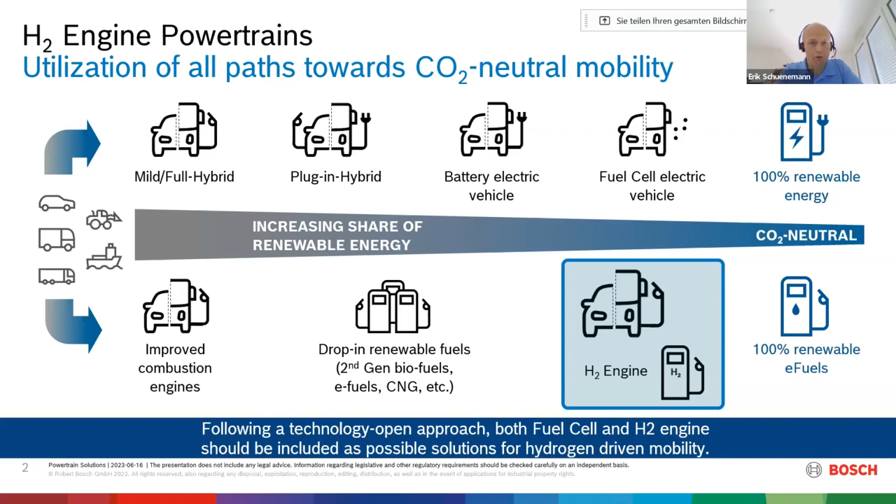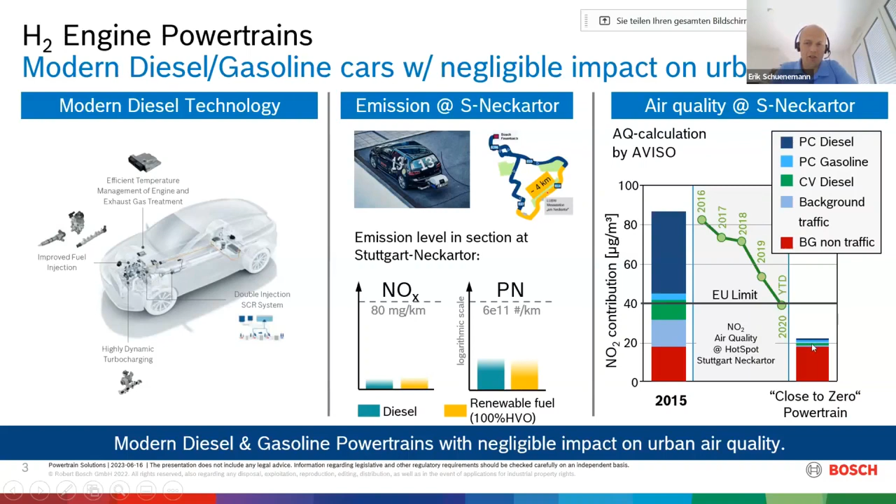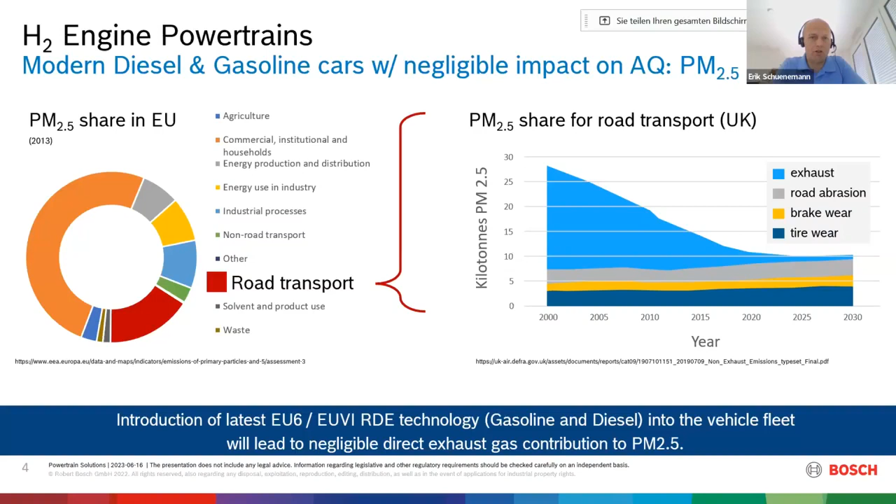Actually, this will get better with hydrogen engines because in hydrogen we have no carbon. That's why particulate emissions, and I would show later also that NOx emissions from hydrogen engine vehicles are significantly lower than I showed you for the latest diesel and gasoline technology.

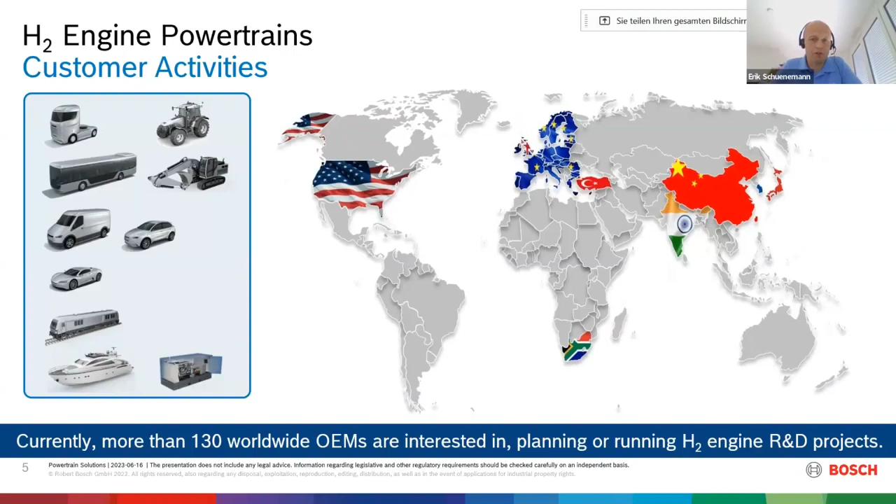And in this case, it also includes the transport sector. Because if the green hydrogen can be produced cheap and can be transported in a low cost situation, that means locally, for instance, with pipelines, then the price at the pump is very attractive and could be even more attractive than for drop-in gasoline or drop-in diesel e-fuel, and also could be more attractive than electricity. So that's why a lot of countries in Africa are jumping on the hydrogen value chain at the moment.

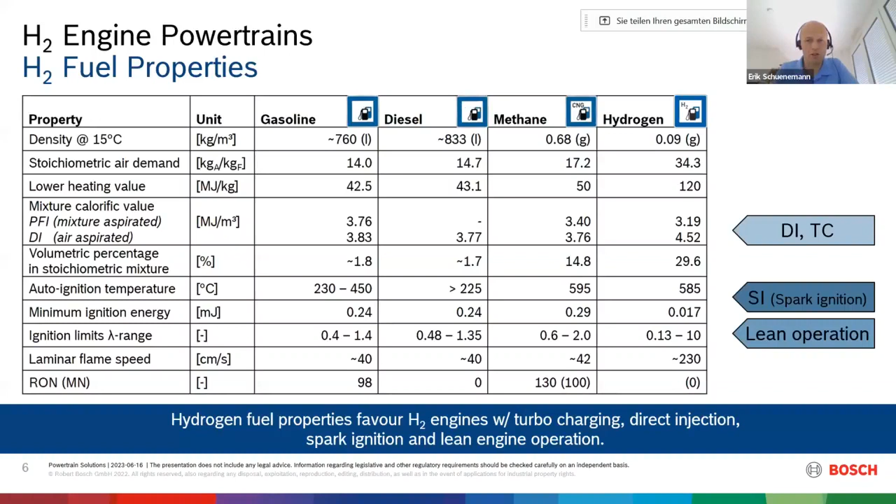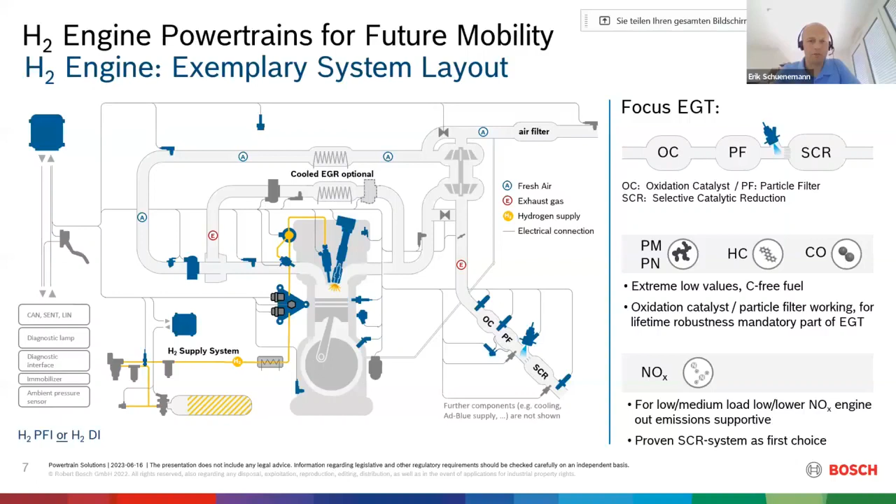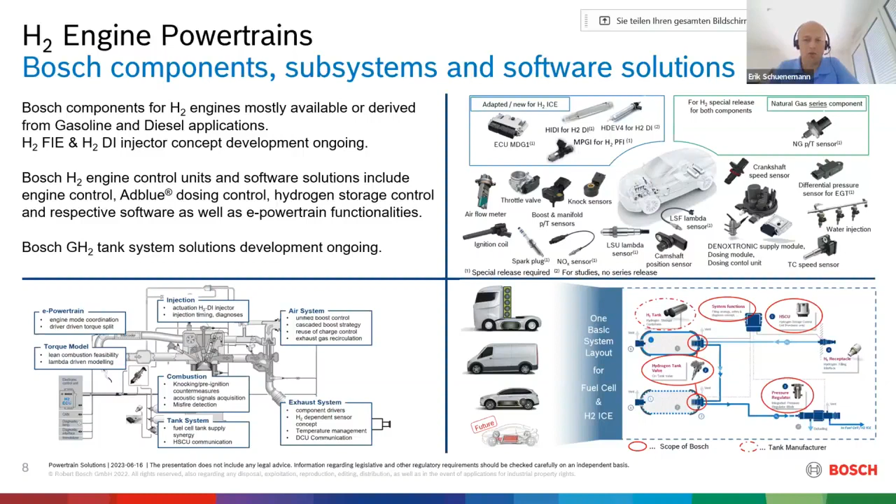Quickly on the injection system - I already mentioned we are focusing on direct injection, in this case low pressure direct injection. There are also some activities in the market where participants use high pressure direct injection, which might give some benefits regarding combustion control. On the other hand, it either reduces the driving range because you cannot run your 700 bar tank empty, or you need an additional compressor to increase the injection pressure or hydrogen pressure for the injection again.

On the other hand we have this kind of diesel-like combustion system, but this needs a diesel pilot injection, so basically we have two fuels then. So we are also not focusing on this right now. Our focus is low pressure DI, and low pressure means a range of 40 bar injection pressure.

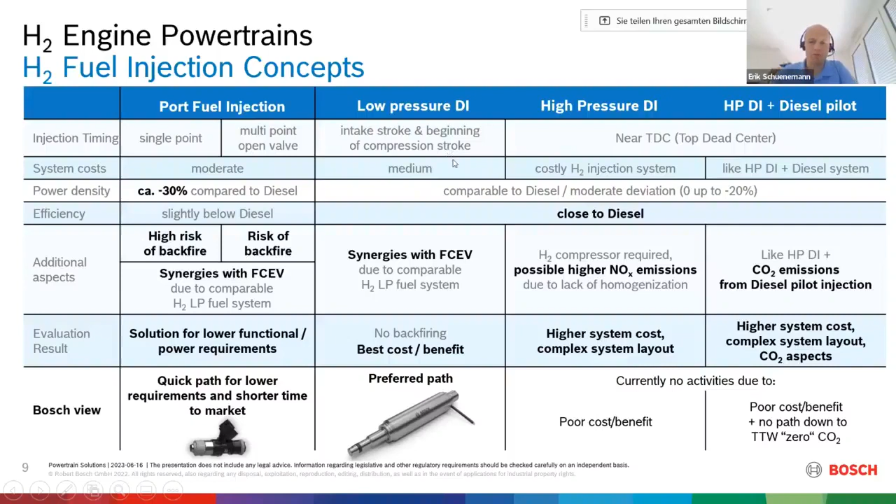When we look at the hydrogen gas jet of the injector, we see that the gas jet development is very sensitive to potential guiding of the jet. Normally the injectors we use for hydrogen injection are hollow cone injectors, so they produce a hollow gas jet with a cone angle of around 90 degrees. This configuration might not be optimum for achieving optimal mixture formation, so we need some devices or measures in order to guide the gas jet.

One very simple measure is simply to reduce the injector tip protrusion in a way that the bore for the injector inside the cylinder head guides the jet downwards. I hope the movies are running - I'll just let it play.

That is high-speed Schlieren technology that we used here to visualize the gas jet. You see the time running here, and what's also very nice at the start is you see shock waves - for the people keen on gas dynamics, that's a nice feature you can make visible, as these waves travel at the speed of sound, Mach 1 basically. You can very nicely guide the jet with these kinds of jet guiding caps - if you need to bend it, or need a multi-hole or multi-spray setup for some applications, that's helpful, and you can do this via applying these jet guiding caps.

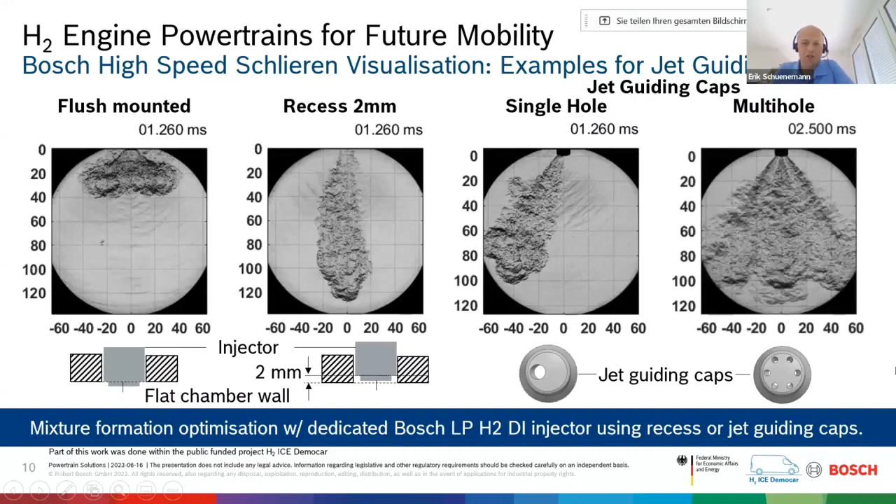Quickly some engine measurement results. This is a heavy-duty engine. On the upper part of the picture we see the diesel engine, and on the lower part we have the engine modified towards hydrogen.

Regarding NOx formation, that is engine-out NOx produced by the combustion itself, we see that the engine-out NOx emissions for hydrogen compared to diesel are massively lower, a factor of 6 or more.

We still have favorably high temperatures, which are important for promoting the AdBlue SCR reaction in the aftertreatment system. So here too, the hydrogen engine makes it a lot easier to achieve ultra-low tailpipe emissions.

We are convinced that the hydrogen engine has even lower impact on air quality than modern gasoline and diesel solutions.

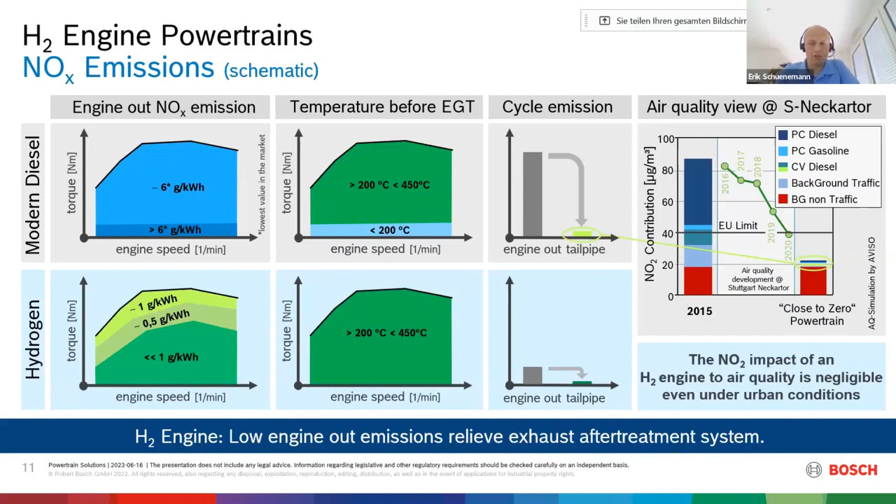Then the question of efficiency is also very important, because if we compare the hydrogen engine powertrain with the fuel cell electric powertrain, the fuel cell has much better efficiency, but this is only true for relatively low to medium power. If you drive the powertrain with high power requirements, the fuel cell efficiency is reduced, and the efficiency of the hydrogen engine powertrain might even be higher.

How can we achieve this for a light-duty, passenger car application? That is hybridization, because electrification of the powertrain in a hybrid situation increases the power at which the hydrogen engine is driven. That is actually done here in this simulation approach.

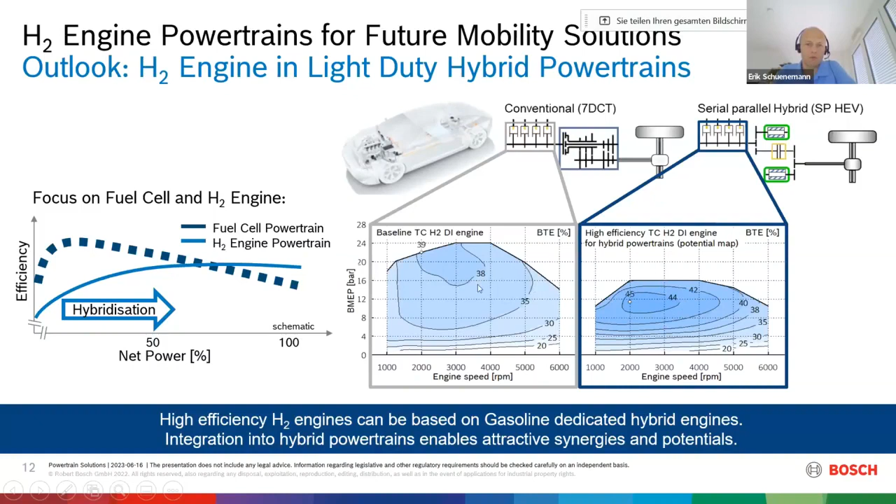We compared a conventional powertrain with a dedicated hybrid engine powertrain, where due to electrification we can also reduce the maximum power of the engine, since that is then provided by the electric system. We use this degree of freedom, less power from the engine, to improve efficiency in the sweet spot. These figures show brake thermal efficiency.

When we calculate the H2 consumption in the driving cycle, the WLTC, the official European or EU driving cycle, we see that we can massively reduce fuel consumption.

For comparison, the fuel cell is still better. If we compare it with the best-in-class fuel cell powertrain, from the Toyota Mirai, it has 0.85 kilograms per 100 kilometers, so still 20% better. But if you look at the cost of the system, the hydrogen engine powertrain is much cheaper.

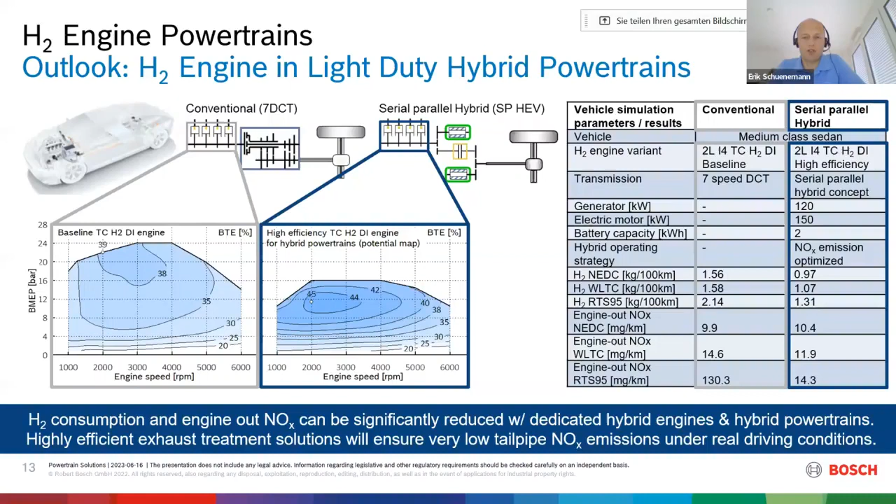Quickly, we also have first results on driving cycles regarding pollutant emissions. In this case, as I've explained, we have a lean burn concept with the elements in the aftertreatment system as described.

We simulated a passenger car powertrain on the engine test bench and ran it in different driving cycles, including RDE driving cycles like RTS 95, which is pretty well known, and also a typical stop-and-go cycle derived from the traffic situation in London, the so-called Traffic for London cycle.

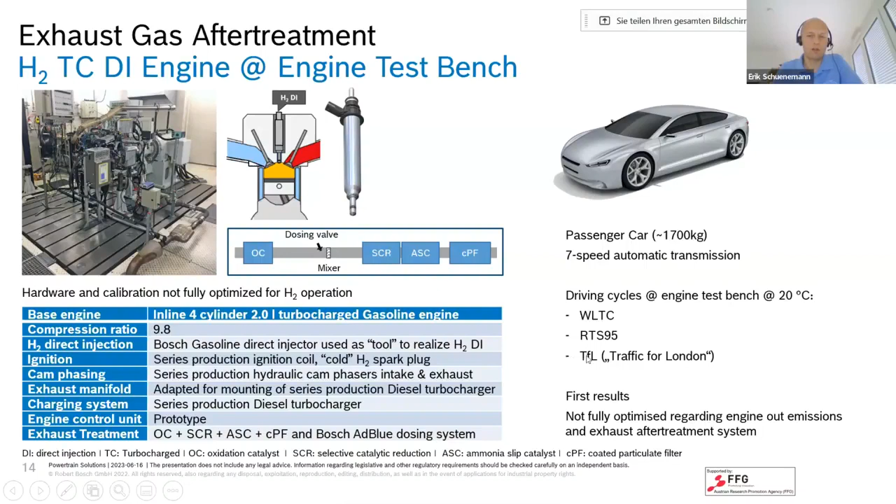When we compare the results for the different criteria pollutant emission components with the gray bars, which are the limits of the upcoming Euro 7 or Euro 7 plus legislation stages currently in discussion in the EU, we see that except for NOx, we have basically a close to zero emission situation.

So CO is below 0.5 milligrams per kilometer, HC not visible, NH3 — which will also be limited with Euro 7 — also very low values, and particulates much lower than the most stringent legislation. The only remaining component is NOx, and here we still have room for improvement.

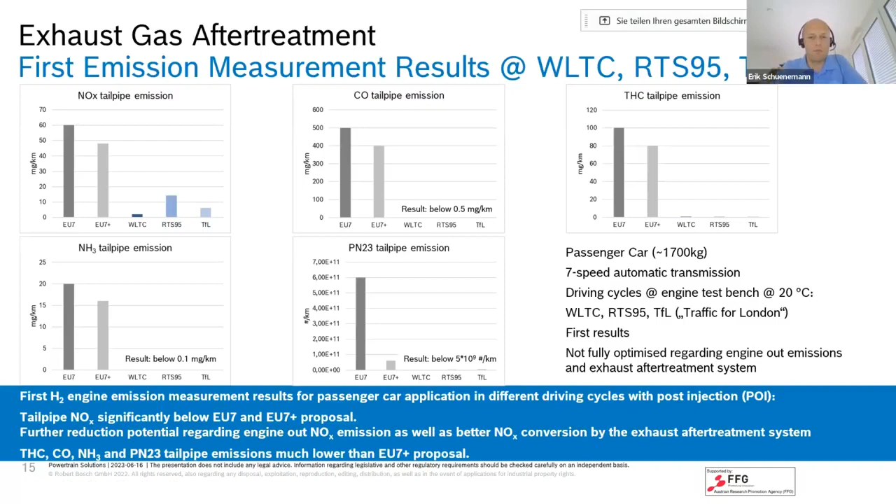We are pretty confident that we can achieve very, very low criteria pollutants with hydrogen engine powertrains. That concludes my presentation.

To sum up, we need a technology-open approach. Bosch is working on it. This technology-open approach includes battery electric, fuel cell, and hydrogen engine, but also drop-in renewable fuels, as we have learned recently from the EU.

Already with the latest Euro 6 technology, gasoline and diesel powertrains will lead to negligible contribution regarding air quality. Hydrogen engine will be even better because the initial conditions for the hydrogen engine are better.

We see massive worldwide interest in this topic. We are working on it, trying to position ourselves as a system supplier, and we are convinced that hydrogen engine powertrains will become an important part of future mobility.